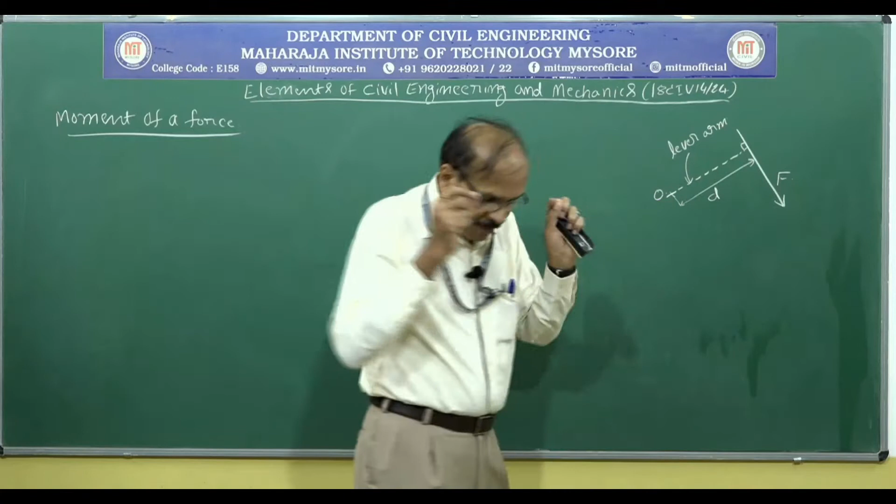So the moment of this force about this point is going to be the force multiplied by the perpendicular distance. And this force is causing a clockwise movement about the point O. So imagine you are having a thread of length d, that is this length.

We are trying to take the moment of this force about this point. So keep one end of the thread at point O fixed and move the other end in the direction of the arrow. So this force causes clockwise movement about this O. Is it clear to you?

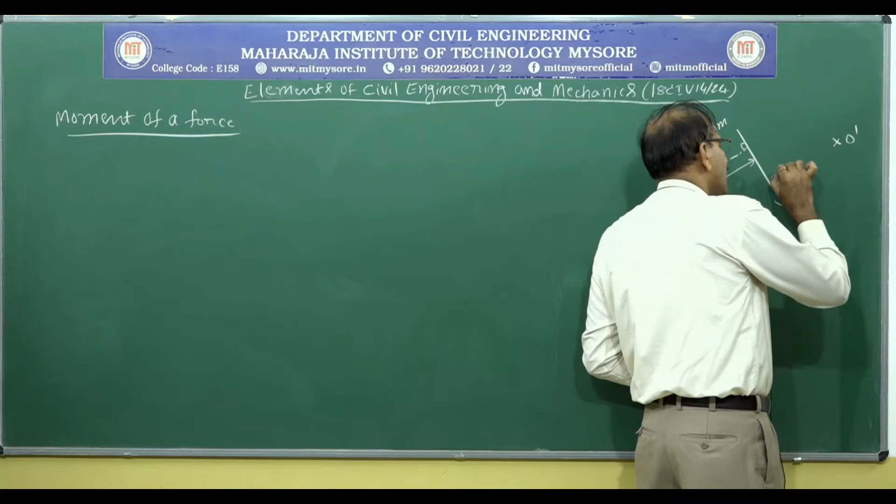Similarly, if I take another point here, say O dash, let d dash be the perpendicular distance from the point O dash to the line of action of the force. Then what is the moment of this force about this point? The moment of this force about this point is given by F multiplied by d dash.

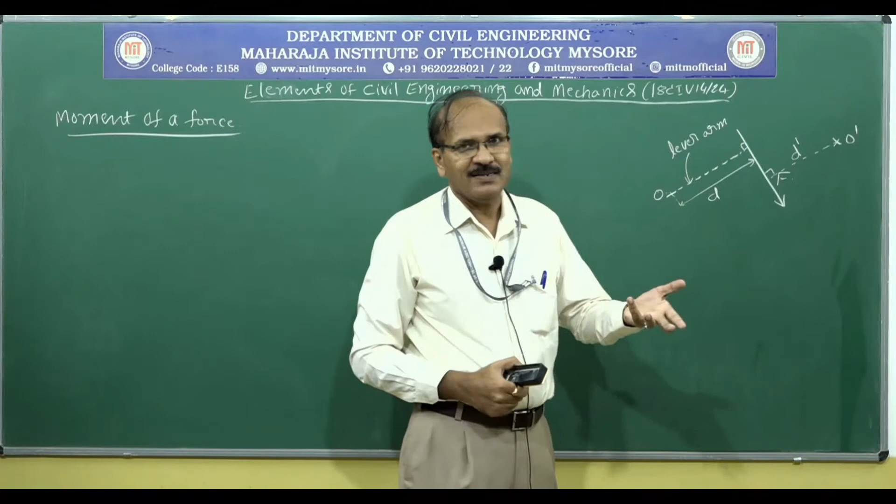And what kind of moment is that? Again, if you move in this direction about point O dash, that force causes counterclockwise moment. So the moment is negative. So we are going to follow a certain sign convention: any moment which is in the clockwise direction as positive and the moment in the anti-clockwise direction as negative.

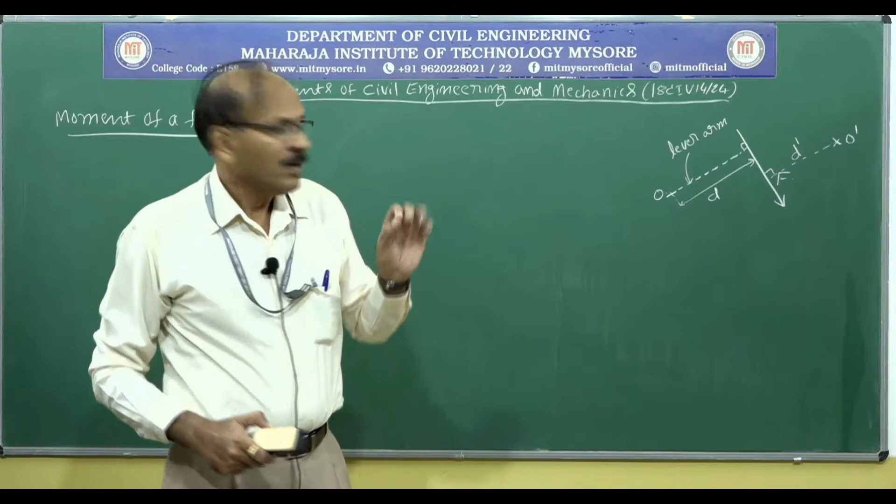So a given force causes clockwise moment or anti-clockwise moment depending on about which point you are taking the moment of that force from. Is it clear to you?

So moment of force about O, I am going to call that as MO, that is F multiplied by D. So what kind of moment is that? That is clockwise moment.

Similarly, moment of the force F about O dash, I am going to call that as MO dash, that is equal to F multiplied by D dash, and this is causing anti-clockwise moment.

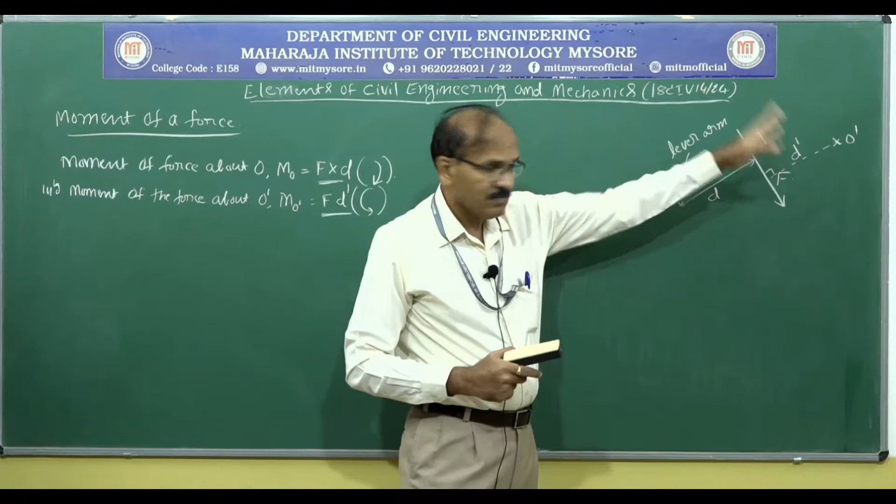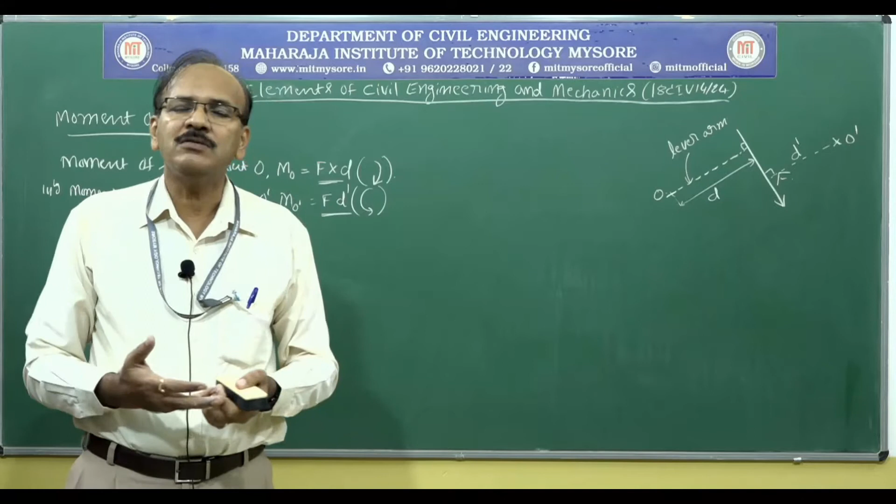Look, the same force causes clockwise moment of magnitude F multiplied by D about the point O. Same thing about the point O dash, it is causing anti-clockwise moment. I repeat, whether that force causes clockwise moment or anti-clockwise moment of any magnitude depends on about which point you are taking the moment from. Is it clear to you?

So this is all about the moment of a force. Let us go with couple.

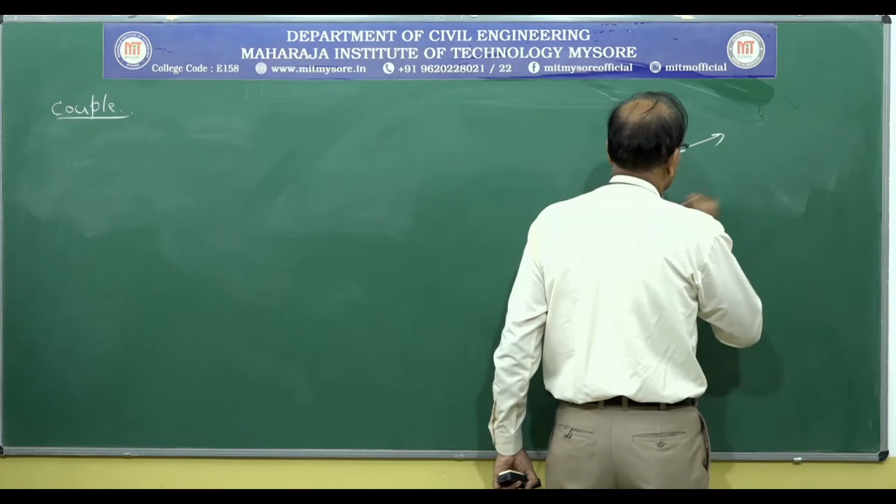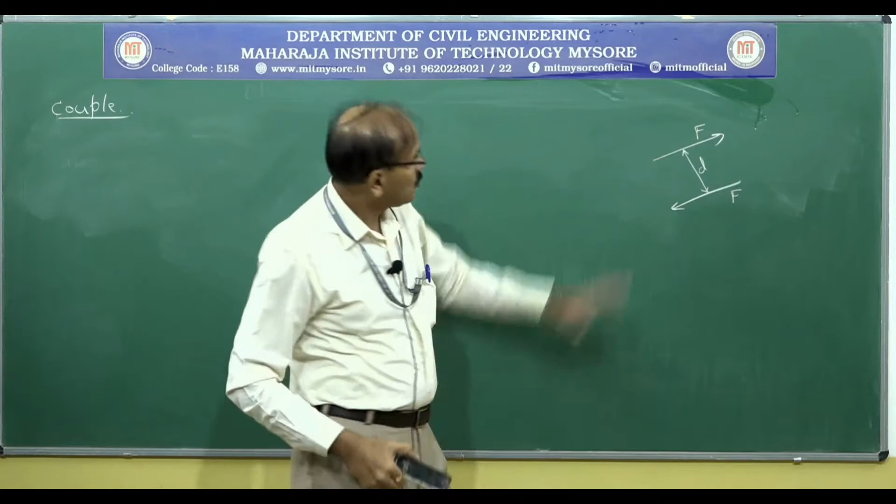So let us consider two forces of the same magnitude which are parallel and acting in the opposite direction and separated by a definite distance d. These two forces form a couple of magnitude f multiplied by d. So what kind of couple is this? This is a clockwise couple. Is it clear to you?

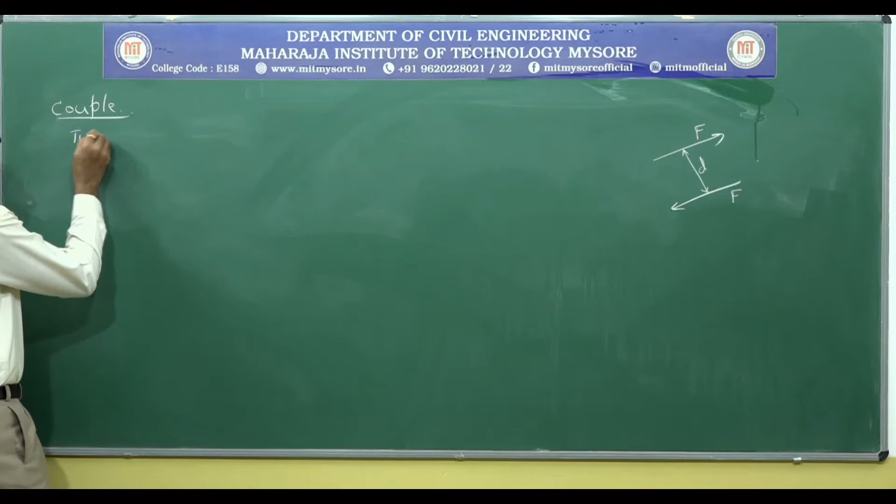So a couple is formed by two equal and opposite parallel forces separated by a definite distance.

From the figure, the moment of the couple is equal to f multiplied by d, and the couple is a clockwise couple.

Coming to next, if I take the magnitude of the couple about any point - here I can take a point, here, here, or anywhere, even just 1 kilometer away in the same plane - then the magnitude of the couple and the nature of the couple remains the same.

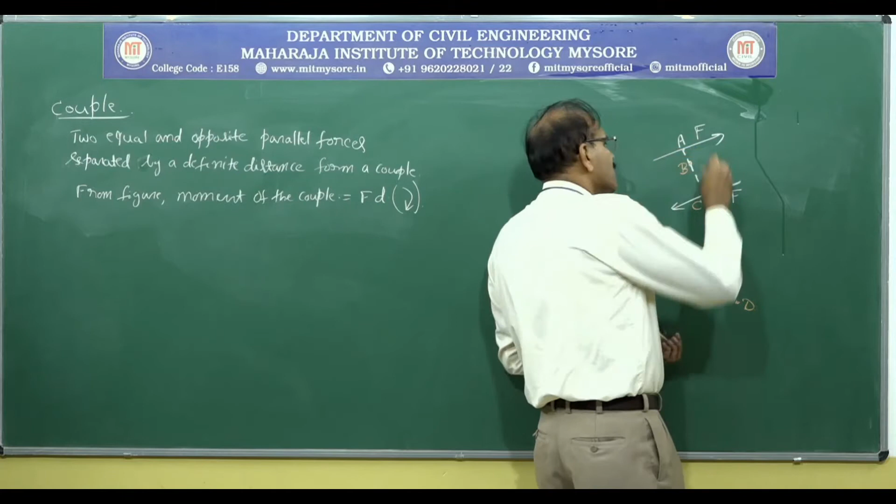So to prove that, I am going to consider this couple. I am going to call this as point A. There is a point here, I am going to call that point as B, point C. So I am going to call this as point D. So this distance, of course, is D.

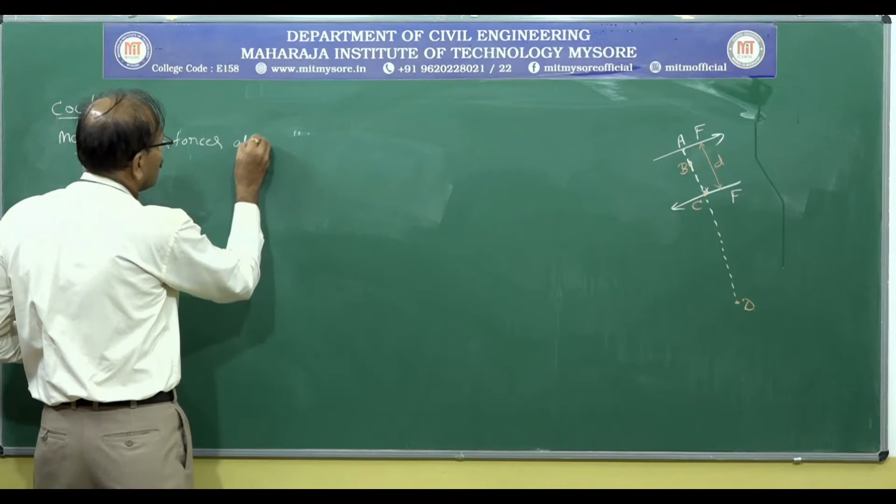Moment of the forces. What are the forces? We have two forces, that is F and F, about the point A. Moment about point A, I am going to call MA. If I take this force, the moment of this force about this point is 0.

Is it clear? Because if there is a point O, and a force F, if this is the distance D, then moment is F multiplied by D. What if I reduce this distance? As I reduce the distance, the magnitude of the moment reduces. Once I move this force exactly onto point O, D becomes 0, then the moment becomes 0.

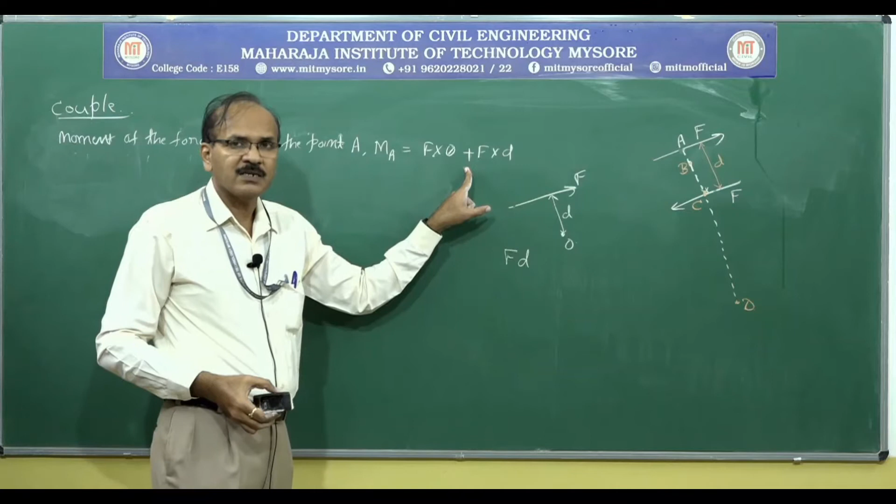Here I am trying to take the moment of these two forces about this point. So this force F causes 0 moment about point A, that is F multiplied by 0, the perpendicular distance. And if I take this force about this point, it causes a clockwise moment of magnitude F multiplied by D. Because according to our sign convention, any clockwise moment or couple is considered positive, so that is equal to F multiplied by D.

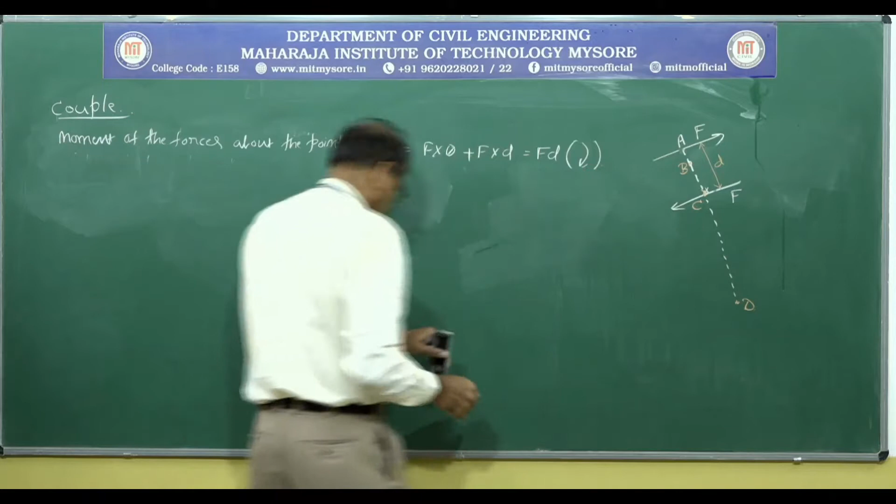Next, I am going to take the moments of these two forces about point B and add them algebraically. Moment of the forces about point B, I am going to call MB. There is a definite distance, AB, which is the perpendicular distance to the line of action of the force from point B. Therefore, F multiplied by AB is the moment this force causes about point B.

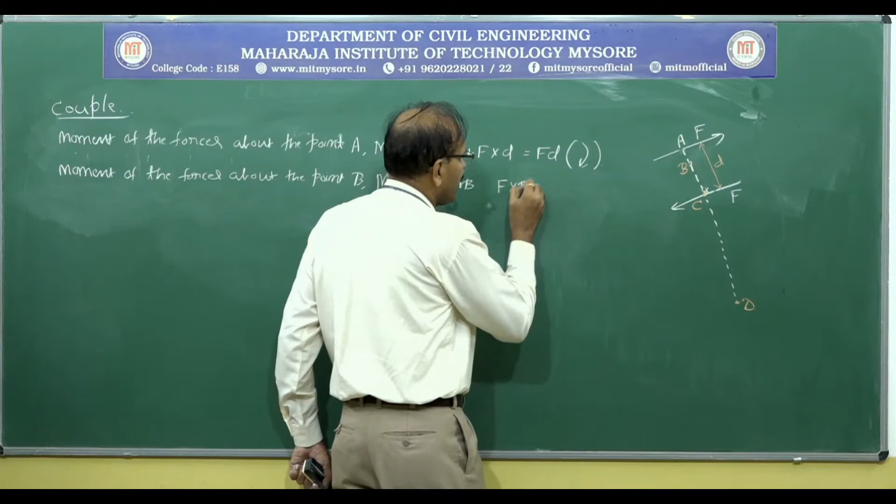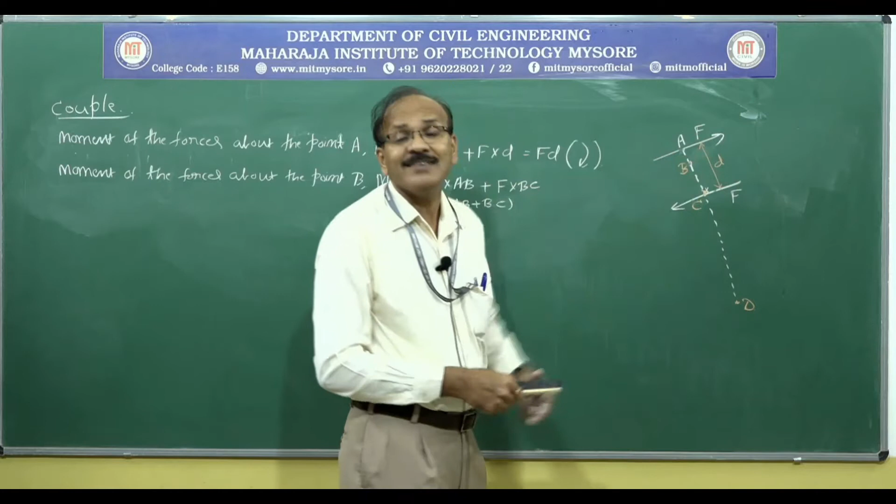What kind of moment is this? This is a clockwise moment, so according to our sign convention it is positive. Next, there is one more force, F multiplied by BC, which causes another clockwise moment, so that is positive too. So that is equal to F times AB plus BC. What is AB plus BC? That is AC, which equals D. So FD, again a clockwise couple.

Next, moment of the forces about point C, I am going to call MC, that is equal to F multiplied by AC, that is D, F multiplied by D, causing a clockwise moment. There is one more force F passing through point C, so this force does not cause any moment about point C. Therefore F multiplied by 0, it does not matter whether this is plus or minus. So that is equal to FD, again a clockwise couple.

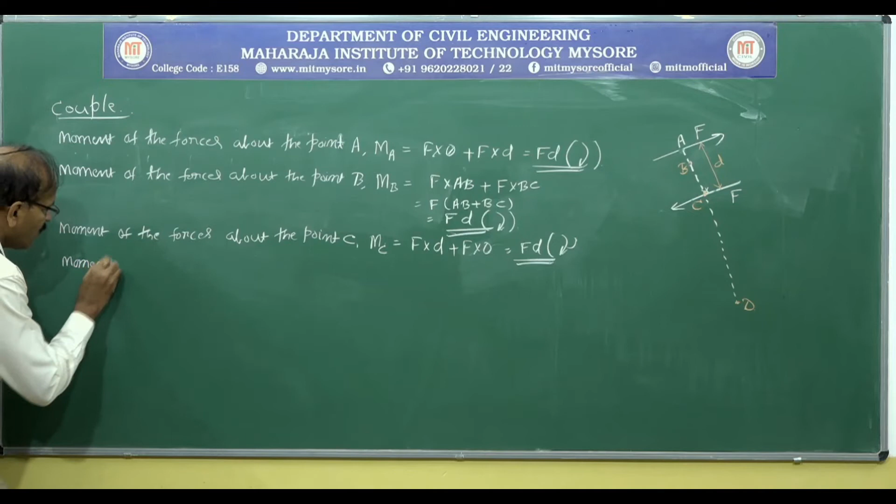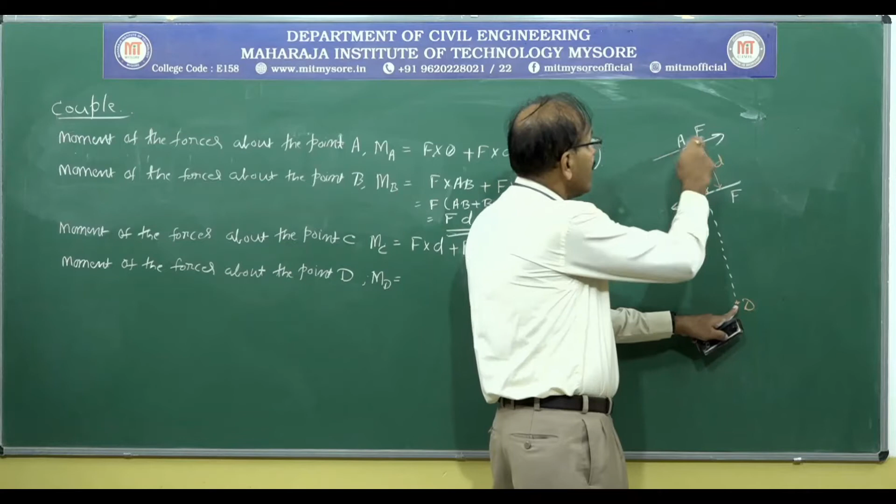Let me take the moment of all the forces about point D and add them algebraically. Moment of the forces about point D is MD, that is equal to this force multiplied by this perpendicular distance, that is F multiplied by AD. What is the sign? This force is causing a clockwise moment about point D, so I am taking this as plus.

Next, there is this force F, and this force is causing an anti-clockwise moment about point D, so it is F multiplied by CD. Because this is anti-clockwise, according to our sign convention, this is minus. So I am going to take minus out: AD minus CD, AD minus CD, that is equal to AC, AC equal to d. So that is F into d.

Here this value is greater than this, so this has a plus sign, so this should be having the same plus sign. That means it is a clockwise couple. So look at the magnitude of the couple, FD, and look at the sense, whether it is clockwise or anti-clockwise. So it is causing the clockwise moment. As I said before, the moment of a couple about any point in the same plane is going to remain constant, so it is going to be the same.

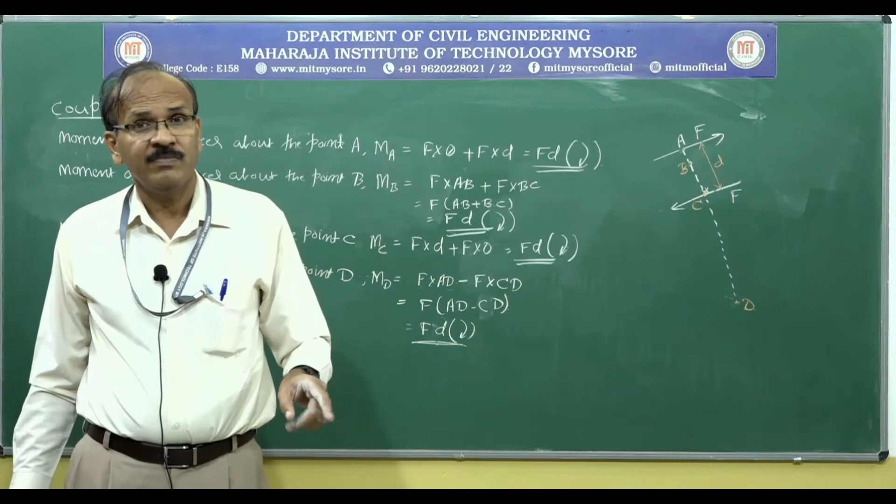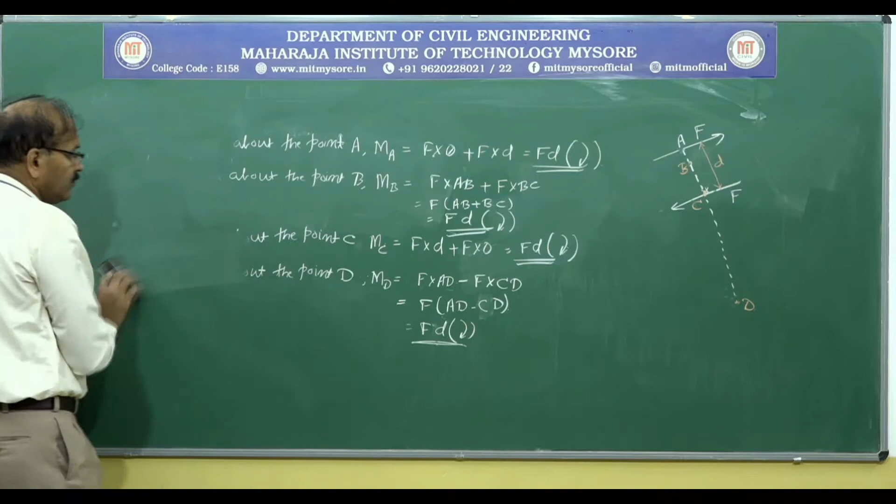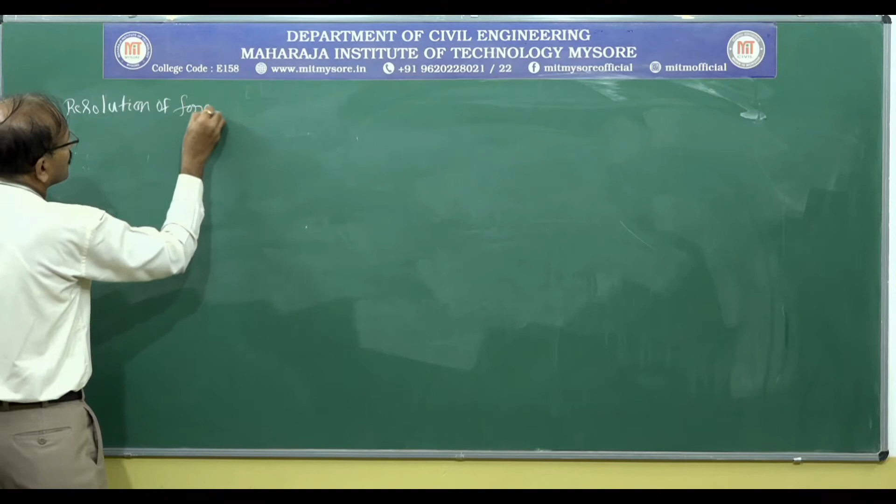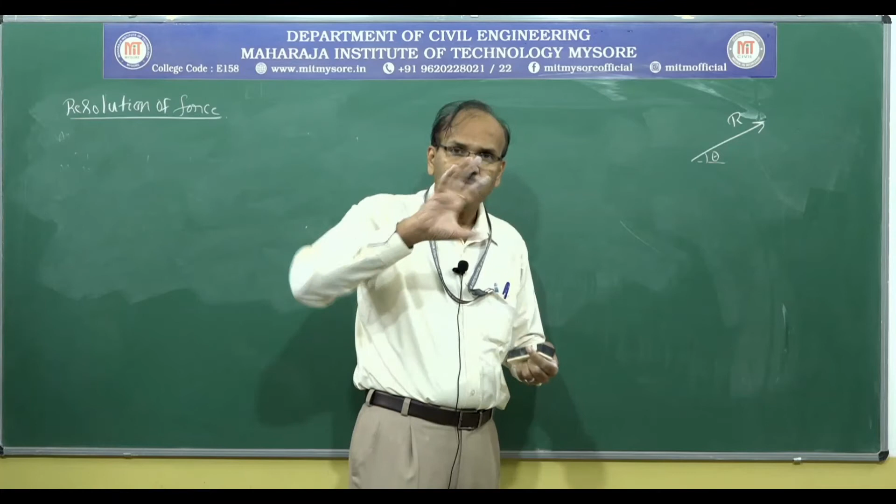Next is resolution of force. So let me consider a force R. I am going to say theta be the angle that force makes with respect to some reference axis. Here the reference axis is the horizontal axis. So I need to resolve this. What is the meaning of resolution? Resolution is nothing but splitting of the forces. This force can be split into any number of forces, even 100,000 forces. Again, when you compose all those forces, finally you will end up getting this back with the same angle theta.

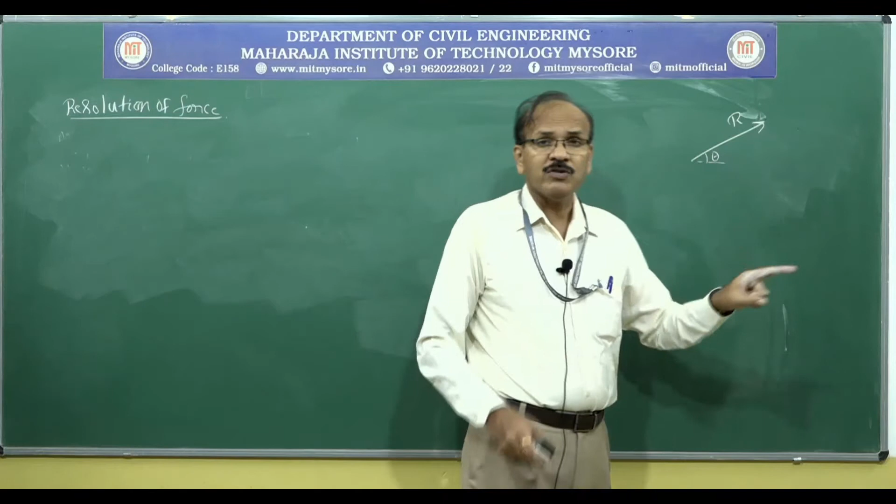For our convenience, we are going to resolve any given force into two components: in the horizontal direction and in the vertical direction, just to solve the given problem. Is it clear to you?

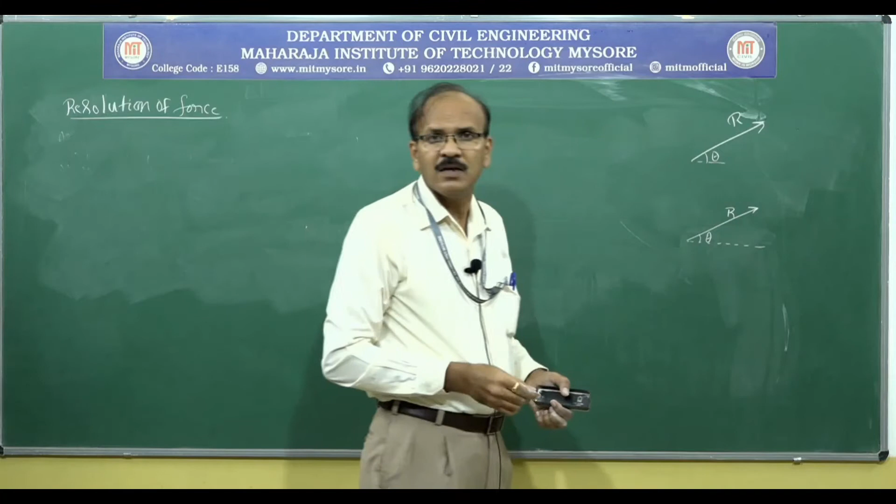So let me consider this force that is making an angle theta with respect to the horizontal. If this is the point O, I am going to call this horizontal axis as X, this axis as Y.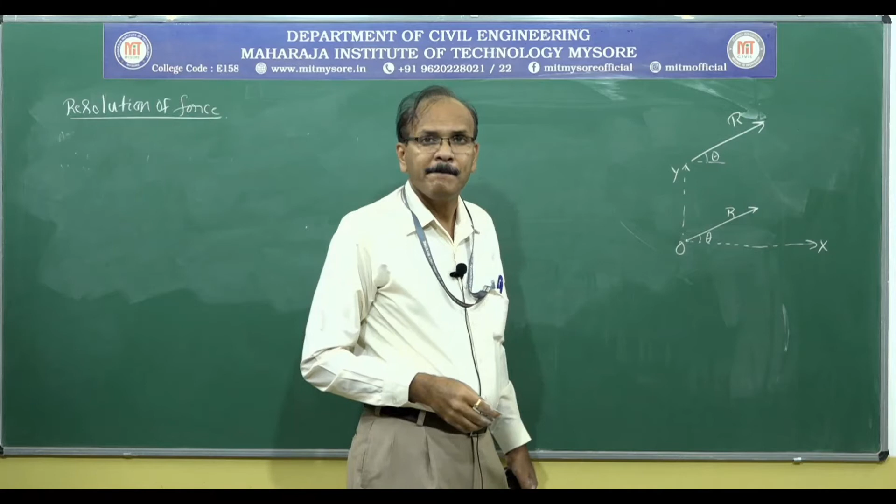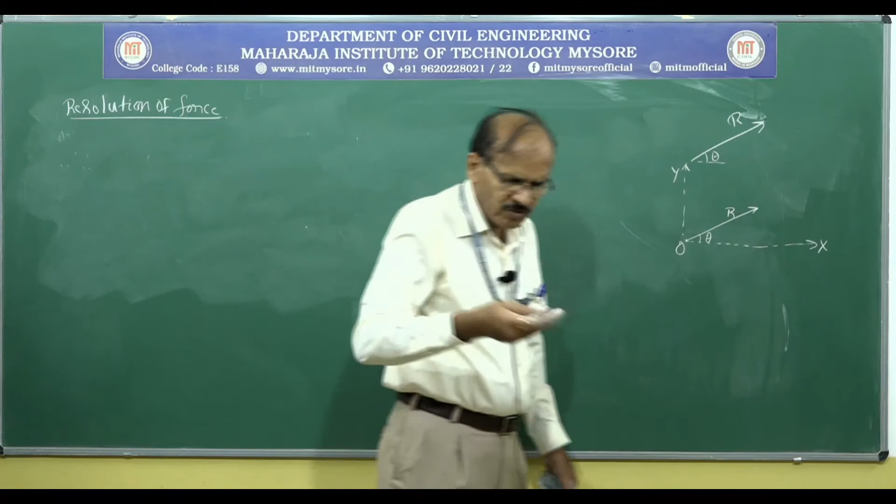So I am going to draw this line to some scale. Say if R is 100 kilonewton, I am going to write 10 kilonewton equal to 1 centimeter. So here this becomes 10 centimeter and whatever the angle given. So we need to resolve this force horizontally and vertically.

So for that what I do is I am going to complete this rectangle. Starting from the tail, I am going to move towards the head, and I am going to put an arrow like this. This is the horizontal component. Arrow like this. This is the vertical component.

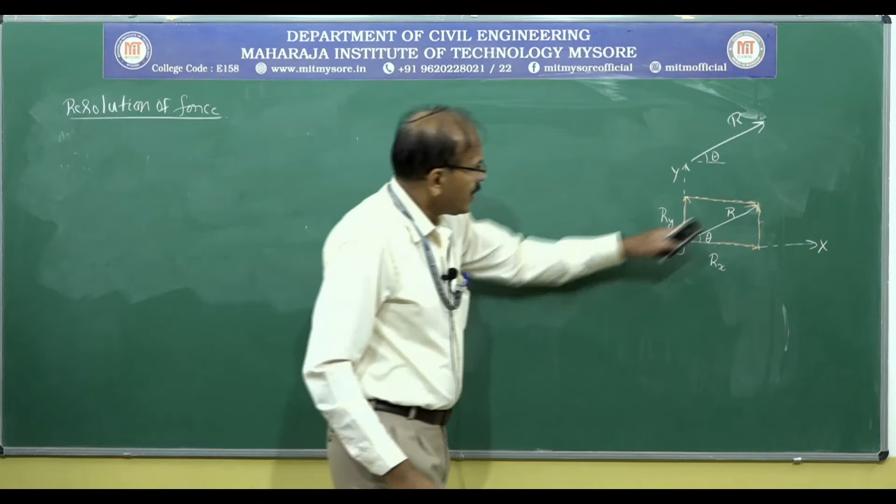So I consider this triangle, this is a right angle triangle. So in this triangle, from the figure, cos theta equal to adjacent side divided by hypotenuse. Therefore, Rx equal to R cos theta.

So Rx is the horizontal component of this force and Ry is the vertical component of this force. By knowing the magnitude of this and by knowing angle theta, we can find out the horizontal component here. R is known, theta is known.

Similarly, sin theta equal to opposite side divided by the hypotenuse. What is this opposite side? Because this is a rectangle, Ry is the opposite side. That is Ry divided by R. Therefore, Ry equal to R sin theta. This is the vertical component of the force R.

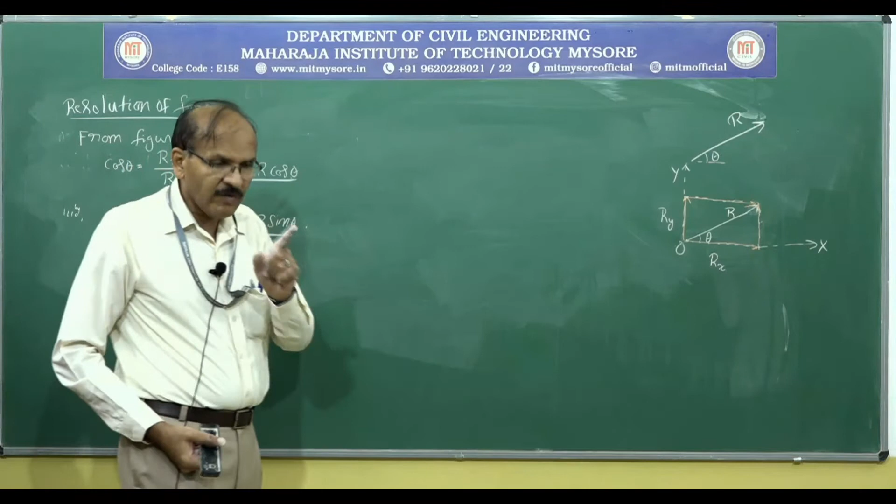So observe one thing here: if you are solving a problem having so many forces, every time when you resolve a force, you cannot keep writing this triangle and writing cos theta equal to adjacent side by hypotenuse, sin theta equal to opposite side by hypotenuse. It is going to be difficult to repeat the same thing, it is time consuming. The simplest way you can remember is: any component adjacent to the angle theta is always cos.

So what is this component? Rx, and this Rx is adjacent to the angle theta. So that means R times cos theta.

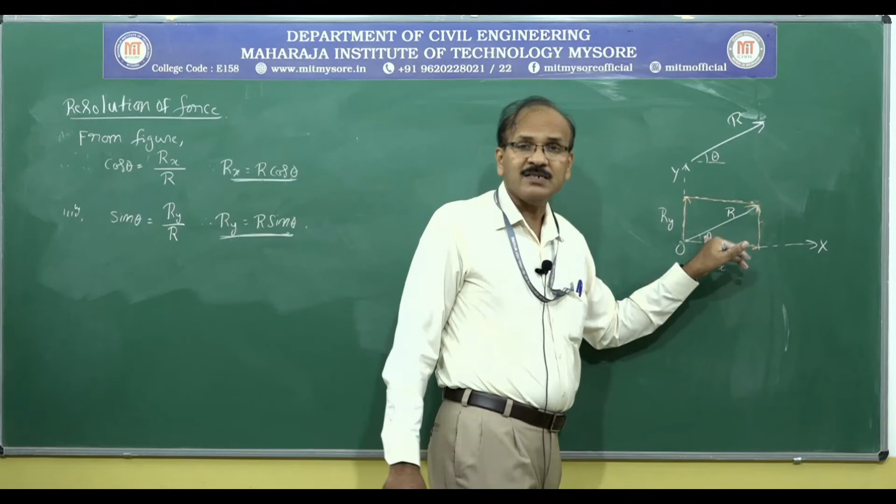Similarly, any component away from the angle theta, these two are the same thing. So any component away from the angle theta is always sin theta. That's why vertical component is sin theta multiplied by the main force which we are trying to resolve. Is it clear to you?

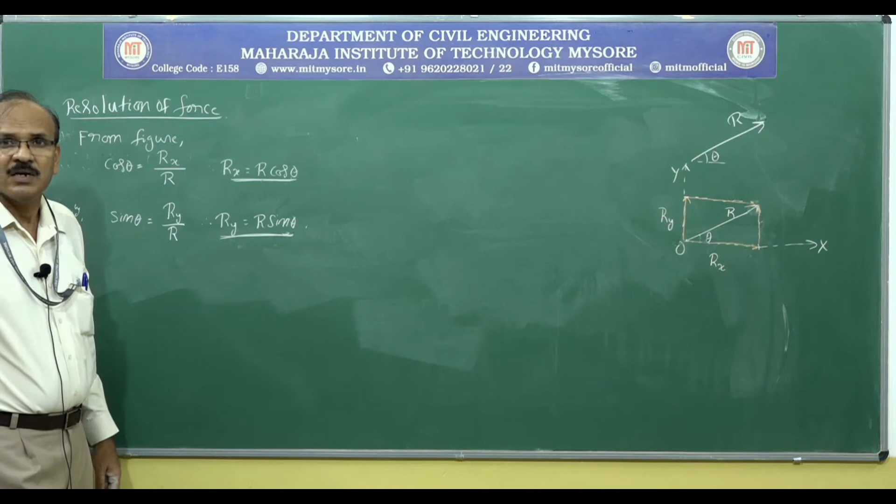And as far as the directions are concerned, here it is moving to the right, that is the horizontal component is pointing towards right, and vertical component is pointing up.

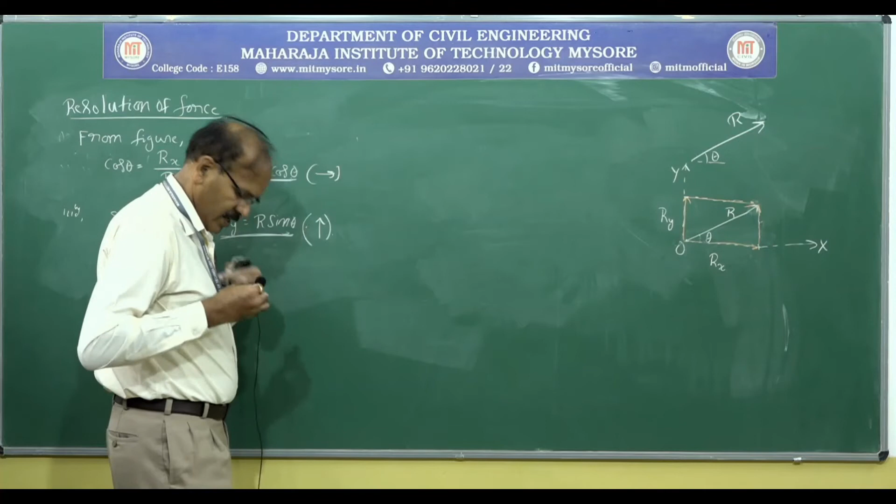So let us follow some sign convention here. Sign conventions: when it comes to the force, horizontal force acting from left to right as positive, then acting to the left, that is right to left, as negative. Similarly, any force acting upwards as positive and any force acting downwards as negative.

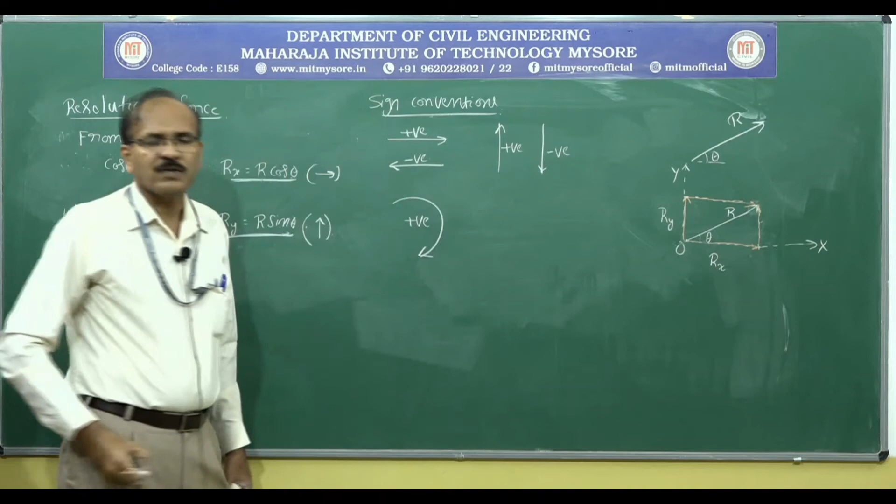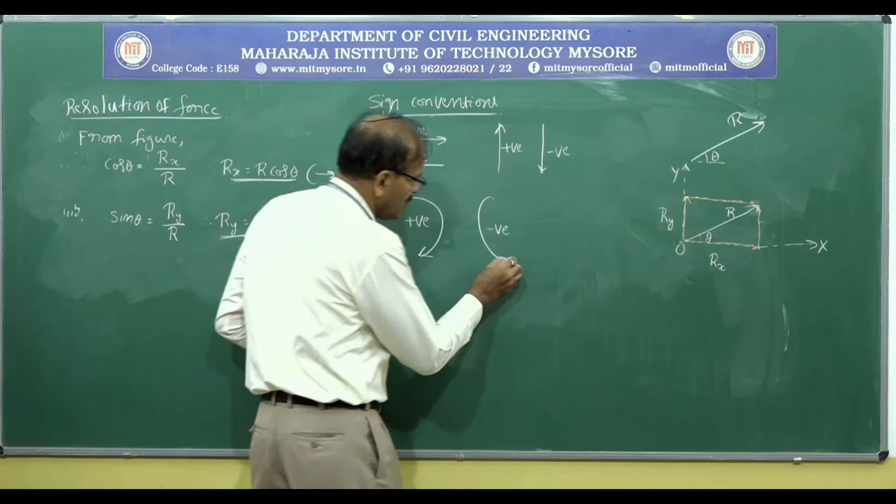Similarly, when it comes to the moment, any moment which is causing or rotating in the clockwise direction as positive, and any moment causing counterclockwise rotation as negative. These are the sign conventions, and based on these we are going to solve the given problems.

If you want to change the sign convention, that is your choice, you can go ahead and change it. That means you can take this as negative, this becomes positive, this as negative, this becomes positive. So if you take this as negative, this becomes automatically positive. That is purely your choice, but these are the sign conventions I am going to follow while solving the problems. Is it clear to you?

So along the same line, if you look here, Rx I have written plus because Rx is acting towards right. According to our sign convention, it is positive.

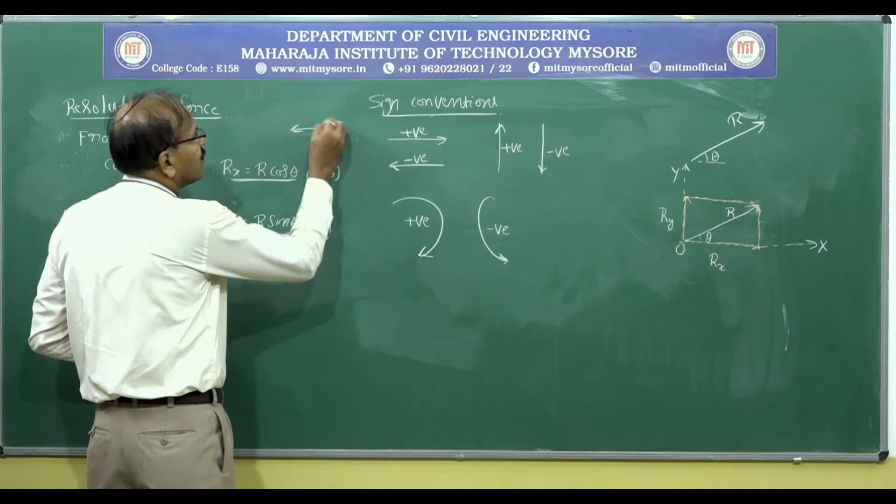When you write the final answer, strip off all those plus or minus signs and replace those signs with the direction. That should be your final answer. What I mean to say is, say for example, this component Rx is acting towards left, so this becomes negative, that is minus R cos theta.

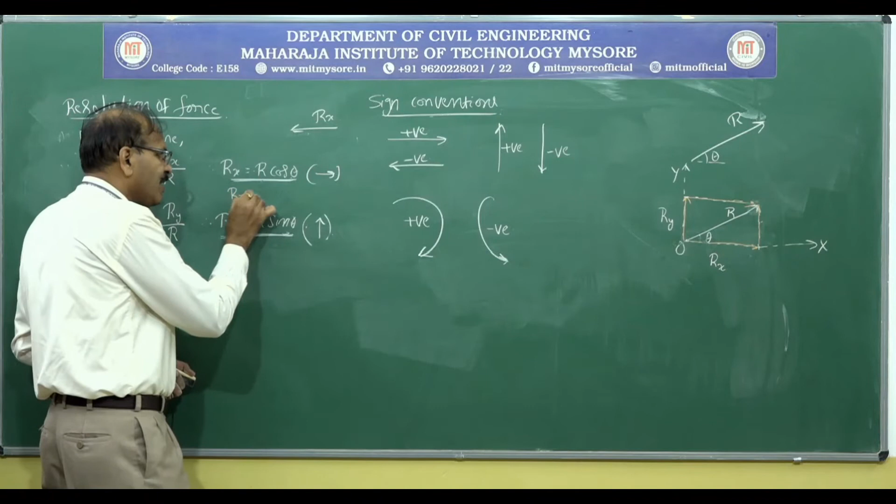So when you are expressing the final answer, what you must do is take out that minus sign, replace that minus sign with the direction which is acting left. That is the final way of expressing the result. Is it clear to you?

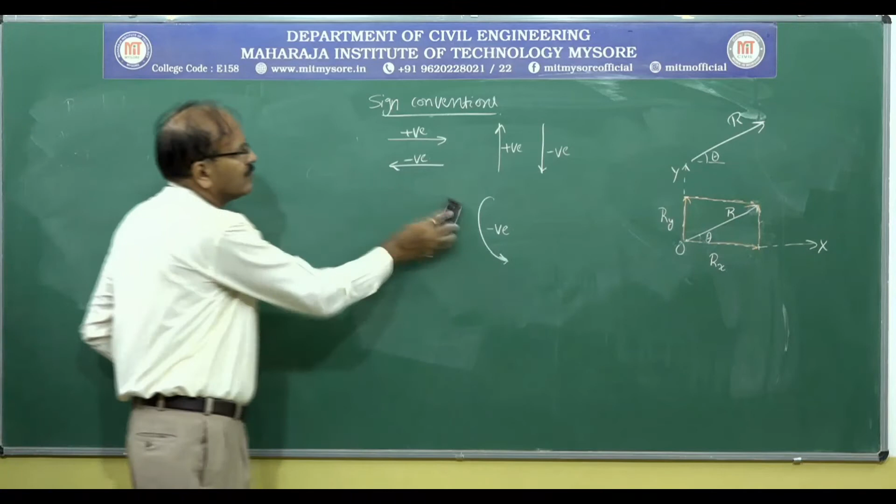Now let us talk about composition of forces. So let me consider a body, and let this body be subjected to several forces all around. F1, F2, F3, F4, F5.

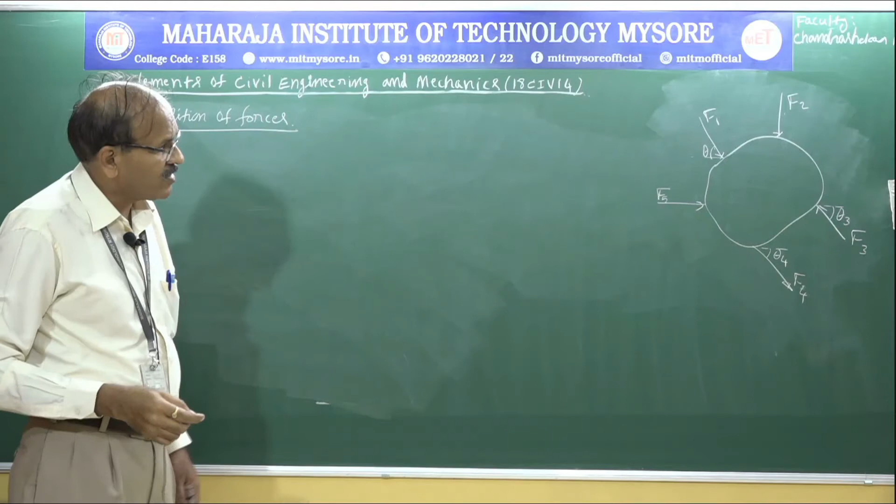In composition of forces, it is quite opposite of the resolution of a force. So what is composition of forces? It is nothing but combining all the forces together and replacing those forces with only one force called the resultant, which will have the same effect as all these forces combined.

Let us take this example. This body is subjected to several forces acting at different angles and in different directions. So I need to replace these forces with a single force such that that single force will have the same effect as all of these forces combined.

So to find out what is the resultant, or that particular single force, the first thing we are going to do is resolve the given forces into two forces which are mutually perpendicular. So here I am going to resolve the force horizontally and vertically first. Let us work on this.

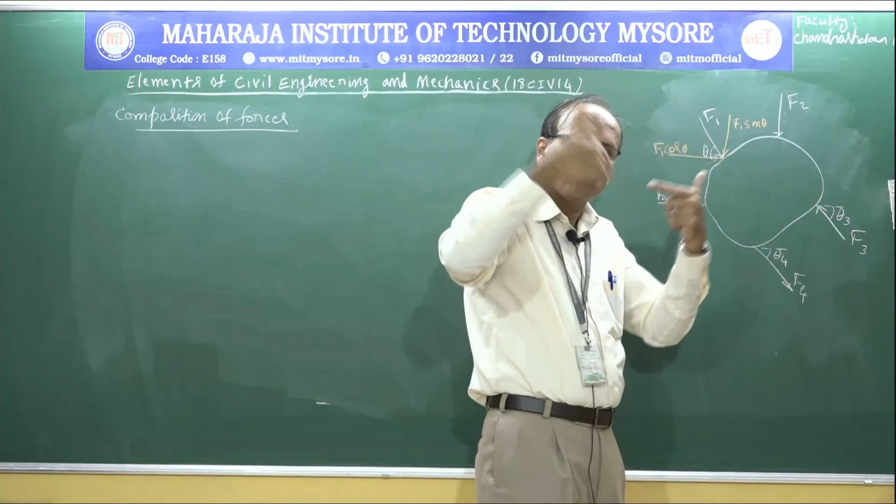If I take the force F1, the horizontal component of F1 is F1 cos theta, because this component is adjacent to the angle theta. So it is F1 cos theta, and the vertical component is F1 sin theta. Look at the arrows, those arrows are acting towards the same point. So once I resolve this force into its components, I am replacing this force with these two forces, so I can forget this force.

If I come here, the force F2, yes, it is already vertical and you don't have to resolve it horizontally because its horizontal component is 0. So component of any force in the direction perpendicular to itself is always 0. This force is vertical, it does not have a horizontal component, so there is no question of resolving it.

Coming to F3, this is inclined at an angle of theta 3 with respect to the horizontal. Let me resolve this horizontally. This is F3 cos theta 3, and the vertical component is F3 sin theta 3. So I can forget this.

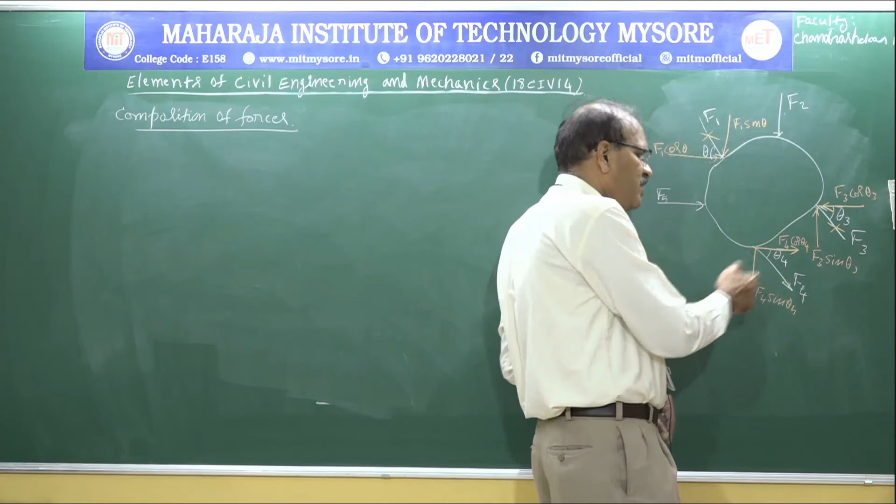Similarly for this, the horizontal component is acting towards right and the magnitude is F4 cos theta 4. Similarly, vertical component is acting downwards, F4 sin theta 4, sin because this component is away from the angle. And of course when I come here, I don't have to resolve this because this is already horizontal, so it does not have a component in the vertical direction.

Now I am going to add all these forces algebraically in the x direction and in the y direction separately. The algebraic sum of all the forces in the horizontal direction, I am going to call that as Fx.

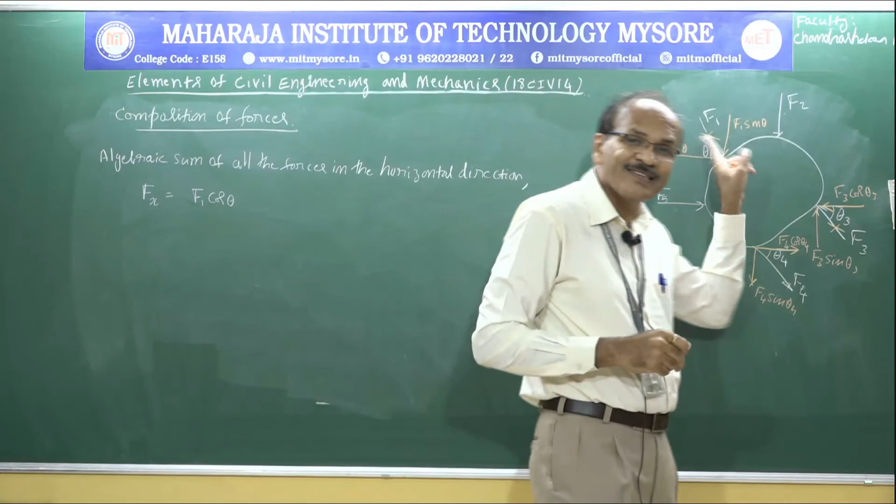If I take the force F1, it is F1 cos theta. So what is the sign for F1 cos theta? Look here, this is acting towards right, it is moving in the right direction. According to our sign convention, any force acting towards right is always positive. So by following this sign convention, I am putting plus here.

Next, coming to F2, this does not have a horizontal component. Let me take this next. The horizontal component here is F3 cos theta 3. But how is the force acting? It is acting towards left. So according to our sign convention, that should be negative. So that is minus F3 cos theta 3.

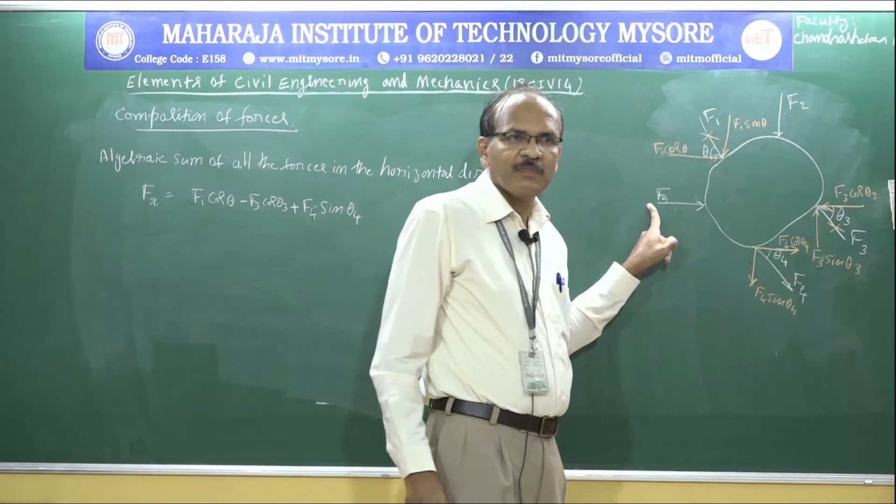Coming to force F4, it is F4 sin theta 4, and it is acting in the horizontal direction towards right, so it is plus sign. Next, coming to F5, it is already the horizontal force which is acting towards right, so it is... sorry, there is a mistake, this should be cos theta 4. Okay, this is Fx.

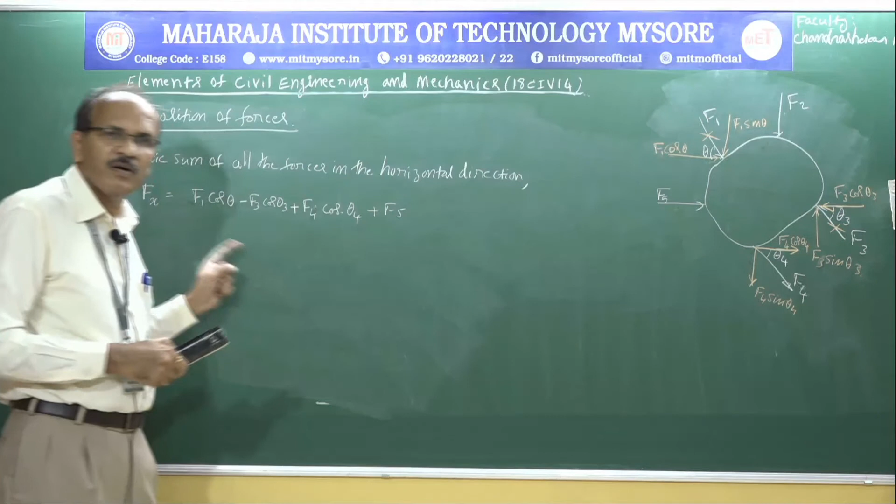Fx is the algebraic sum of the components of all the forces in the horizontal direction. In a better way, that can be written as sigma Fx, because it will have more than one force. Similarly, sigma Fy is given by, again coming here, that is F1 sine theta.

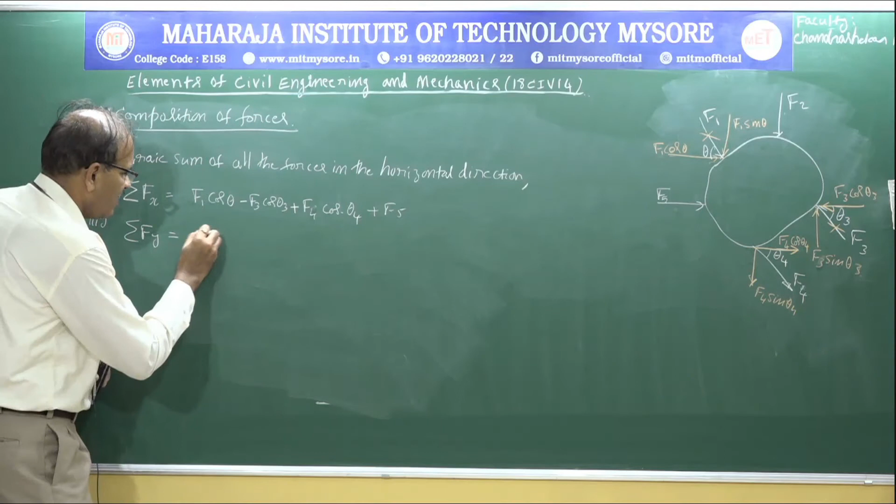So what is the sign? It is acting downwards, so according to our sign convention, it is minus.

Next, coming to F2, that is minus F2, because it is already vertical and it is acting downwards, so F2 is the magnitude.

Similarly here, when we come to F3 force, F3 sine theta 3 is the vertical component of F3, and this component is acting upwards. Upwards means, according to our sign convention, it is positive. So that is plus F3 sine theta 3.

Here, minus F4 sine theta 4. So these two are the components of the resultant, the final resultant we are going to get, in the horizontal and the vertical directions. Is it clear?

Now, when we add this number algebraically, this may be negative or positive. We don't know. The negative or positive depends on the values of F1, F3, F4, F5 and these angles, that is theta 1, theta 3 and theta 4.

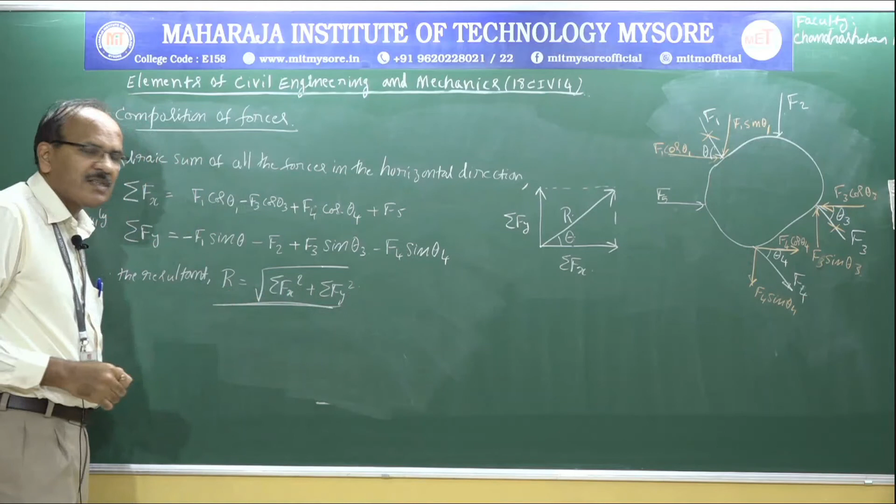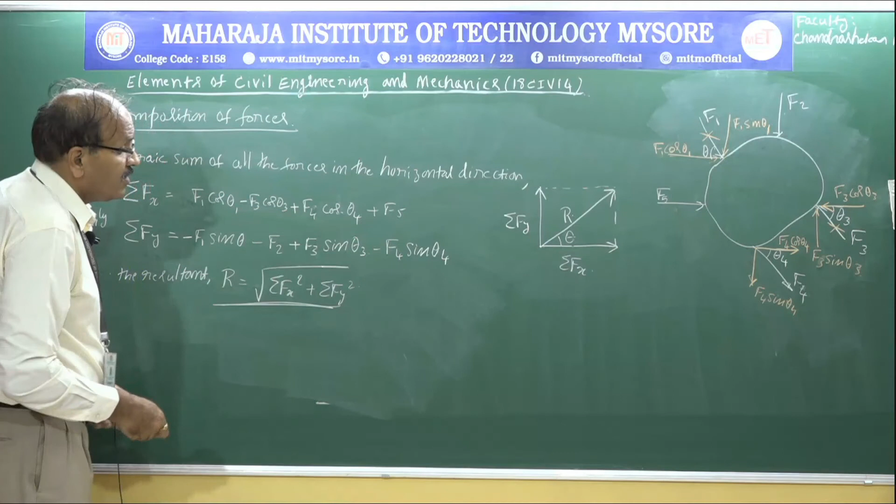We got the value of the resultant, but we don't know what is this angle theta. Unless we know, we cannot draw this, because we don't know at what angle we need to write the resultant. So to find out angle theta, what we do is tan theta equals sigma Fy divided by sigma Fx, that is theta equals tan inverse of sigma Fy divided by sigma Fx.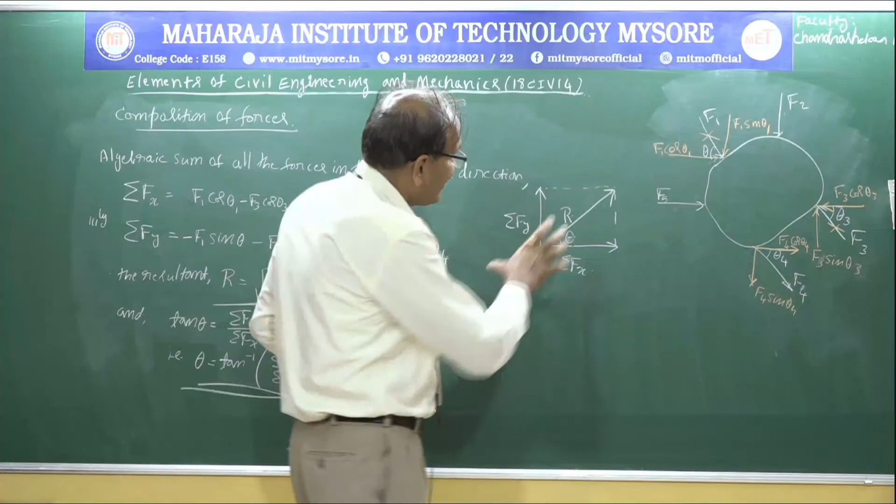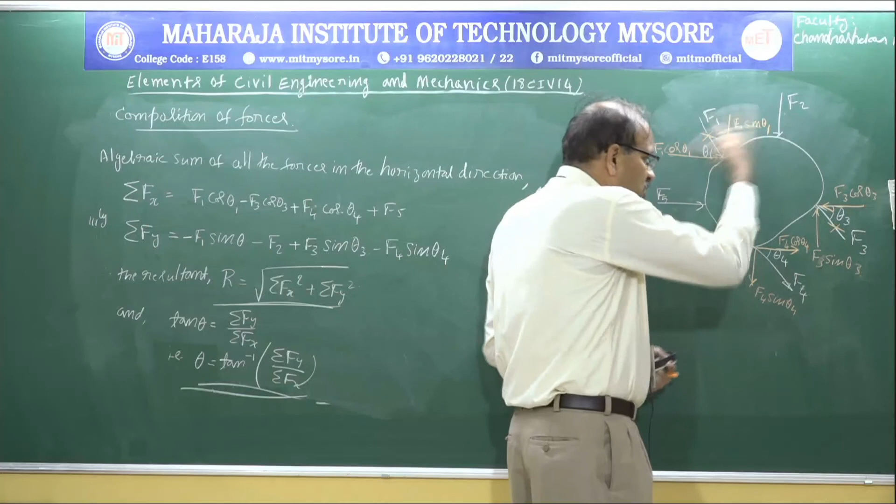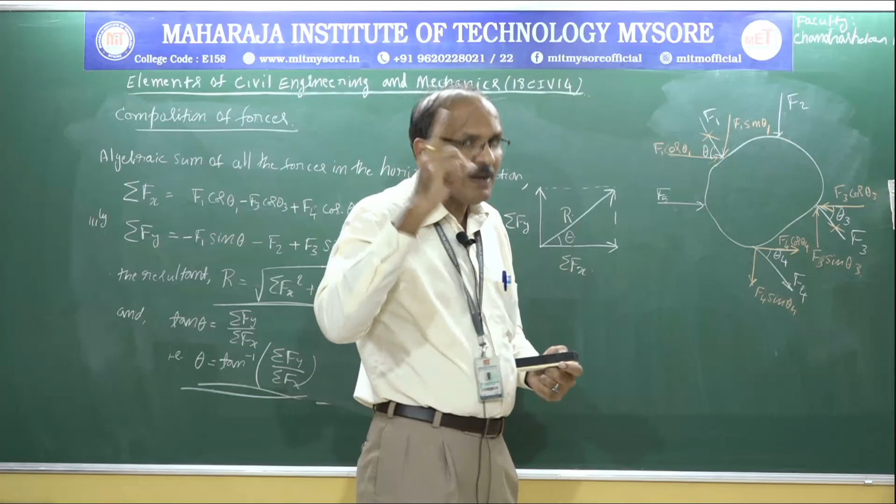So by knowing these two, we can draw this resultant force. So now we know the magnitude of the resultant, we know the direction in which the resultant is acting. That means these forces will cause the motion of this body in a certain direction with a certain magnitude of force. So you can take out all those forces and replace them with only one force R, and that force R should be acting at an angle of theta with respect to the horizontal on this body.

This is called the composition of forces, that is, combining all the forces and converting all the forces into a single force.

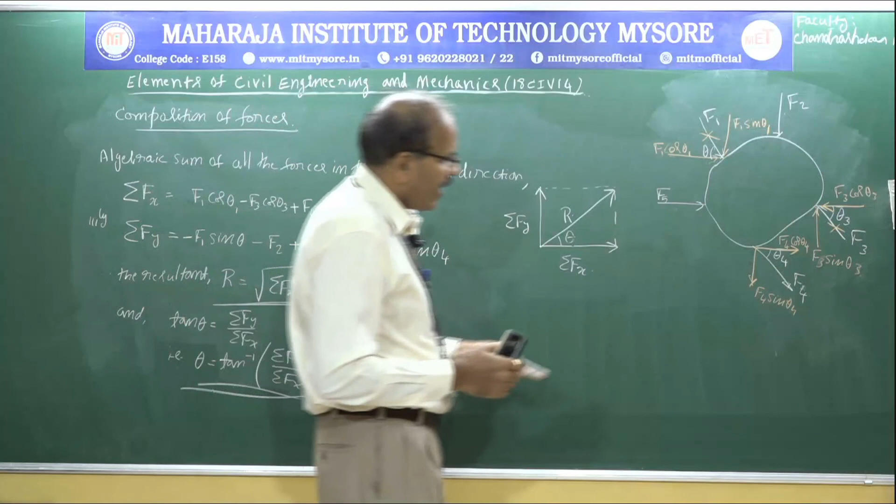So with this I am going to end this, but I need to add some more points to it. So here I said any component adjacent to the angle is always cos theta.

Sometimes what happens, say for example I take this force, say F6. If I take F6 force, let us say this is making an angle of theta 6 with respect to the vertical. So if I resolve this force vertically, the vertical component is F6 cos theta 6, and the horizontal component is F6 sin theta 6.

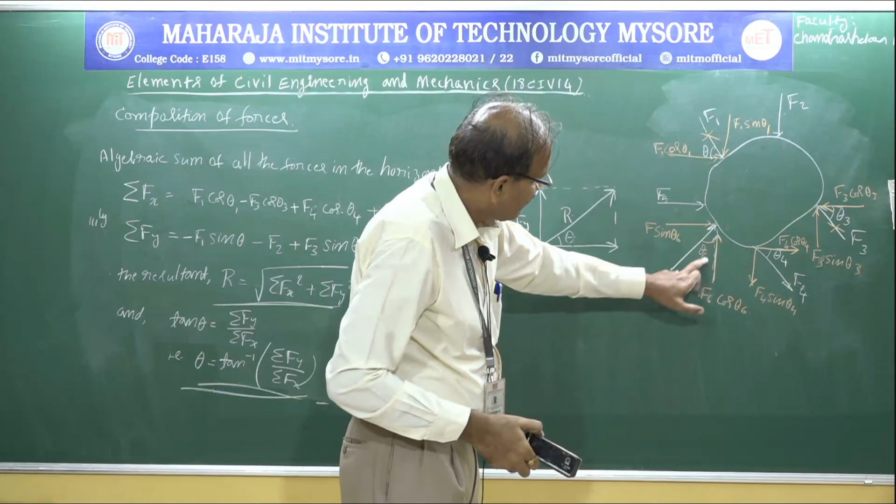Look here: vertical component is cos theta, the reason is this component is adjacent to the angle theta 6, that is why this is cos, and the horizontal component is away from the angle theta 6, that is why it is sin theta 6.

Is it clear? So it is not always that horizontal is cos and vertical is sin, no. You need to look at the angle where it is acting, whether you are taking the angle with respect to the horizontal or with respect to the vertical. Based on that you have to make a decision.

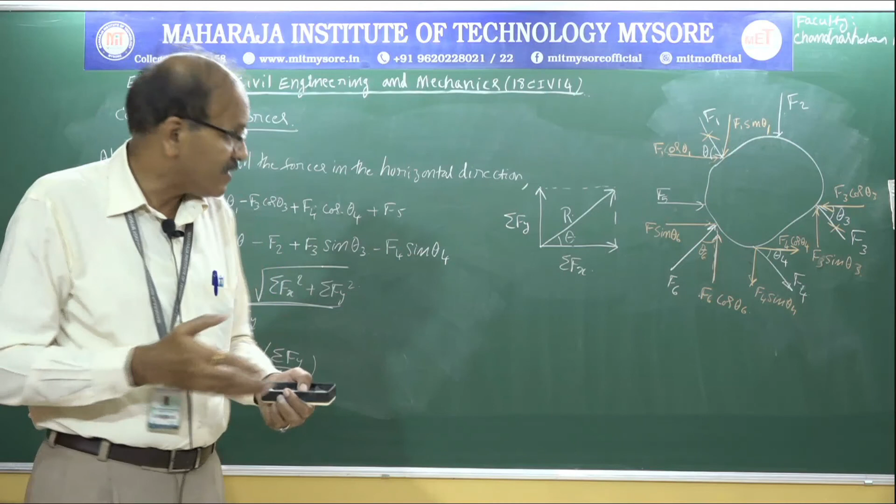I hope this is clear, and after this I am going to solve some problems. Thank you for this class.